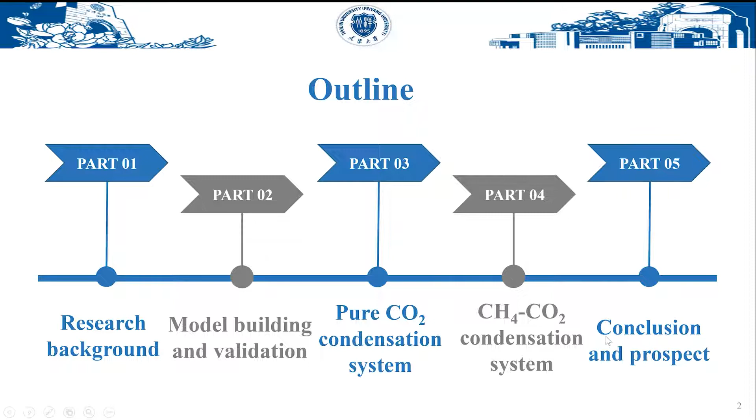My presentation will cover the following 5 parts: research background, model building and validation, pure carbon dioxide condensation system, methane carbon dioxide condensation system, and final conclusion. Let's start with the research background.

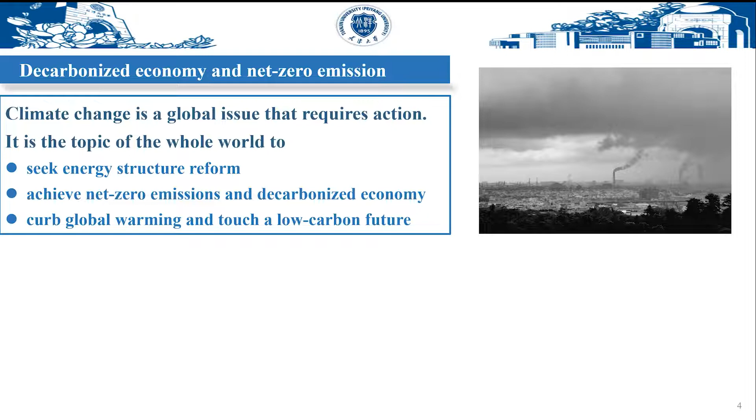Climate change is a global issue that requires action. Climate science has produced mounting evidence that human-caused greenhouse gas emissions must decline if we want to limit global warming below 1.5 degrees Celsius. The Paris Agreement responded to this challenge by legally binding signatory nations to achieve a climate-neutral world by mid-century. The European Commission has also agreed on the European Green Deal, seeking to foster a future with a decarbonized economy and net zero emissions by 2050.

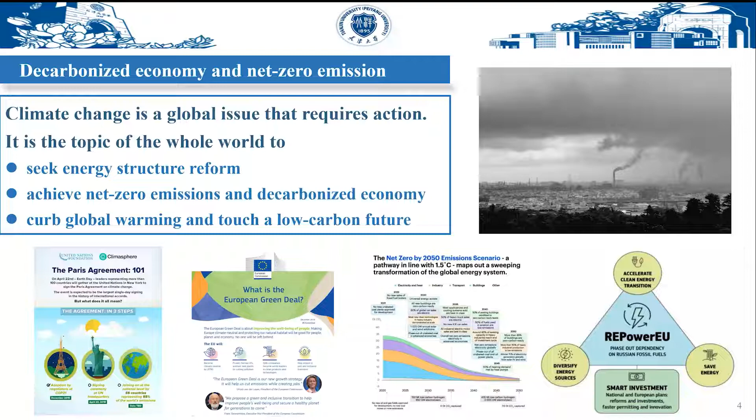The European Commission released the proposal REPowerEU, Joint European Action for More Affordable, Secure and Sustainable Energy. The 2050 net zero scenario developed by the International Energy Agency contends that no new oil and gas fields should be approved after 2021. In addition, at least 70% of the world's energy supply should come from wind and solar energy by 2050. This means the energy structure needs to be adjusted for a low-carbon future.

Carbon capture and storage is one of the most promising technologies to tackle climate challenges. The separation of carbon dioxide is a critical step toward achieving the economic and technical objectives of carbon capture and storage. The present study proposed a novel carbon dioxide capture concept using energy conversion in transonic flows, which is not only a clean process of carbon dioxide processing, but also a way to maximally utilize the thermal energy.

The working principle of the supersonic nozzle, the core component, is that the contraction of the cross-section causes the expansion of gas, which reduces the temperature and increases the gas velocity. The generation of a low-temperature environment leads to the condensation of carbon dioxide gas into nanodroplets. By integrating the principle of cyclone separation, carbon dioxide droplets will be removed to achieve carbon capture.

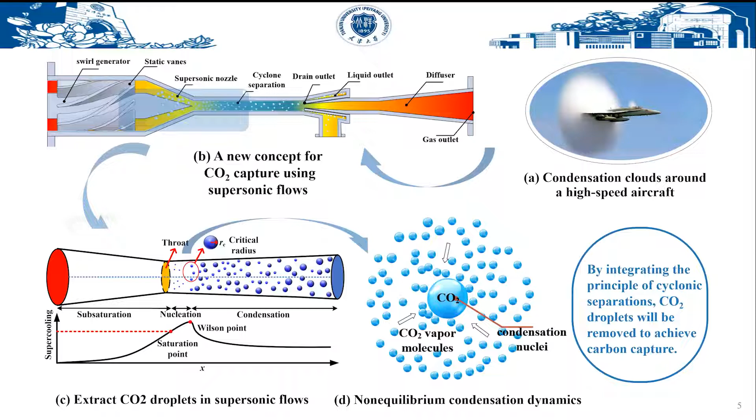The condensation phenomenon in supersonic flow has been numerically studied by many researchers, but there are still some problems. First, most of the subjects are water vapor. The condensation properties of carbon dioxide have not been explored, and most of the physical property equations in their models use the ideal gas state equation. The ideal gas model cannot correctly reflect the phase change of carbon dioxide in high-pressure environments. Therefore, we have modeled the condensation of carbon dioxide in a supersonic nozzle based on a real gas model.

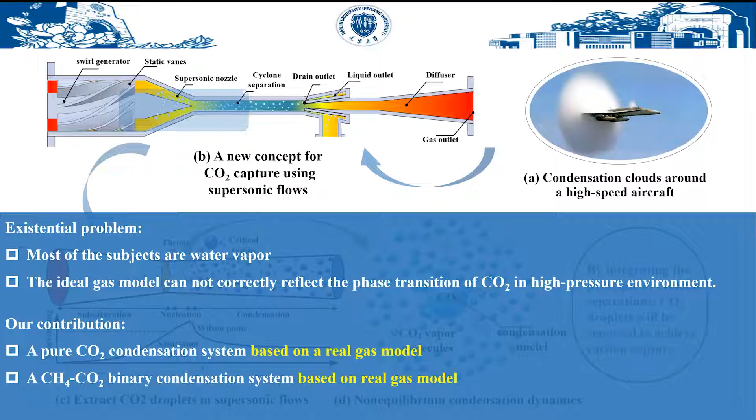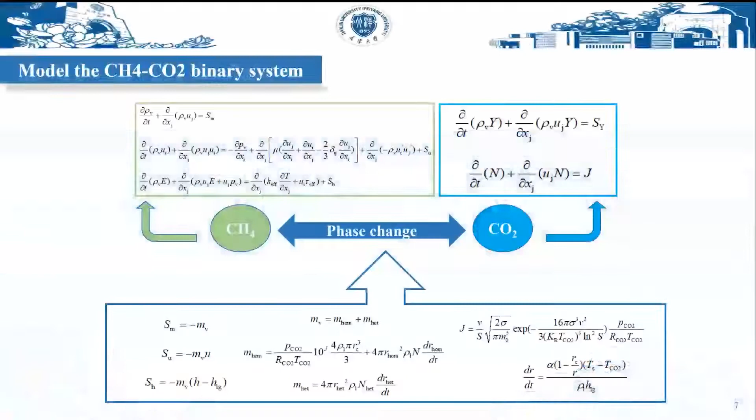Next, please allow me to introduce this new condensation model. In this model, the carrier gas is methane, whose mass, momentum, and energy conservation equations are listed in the upper left. The liquid phase is carbon dioxide, whose governing equation is listed in the upper right. Phase change between gas and liquid is manifested as condensation and evaporation, and is reflected in the source-term exchange in the governing equation.

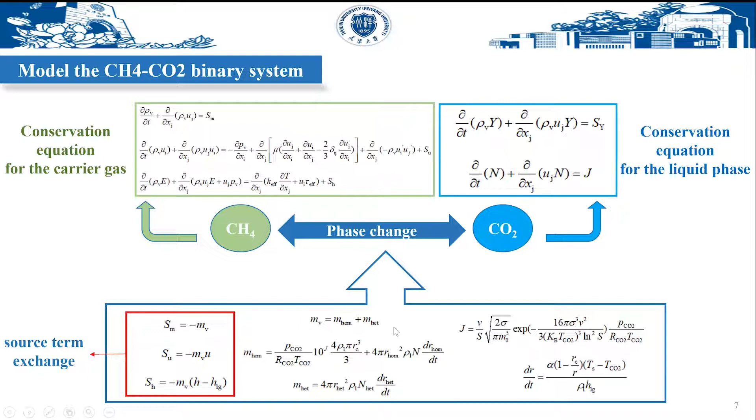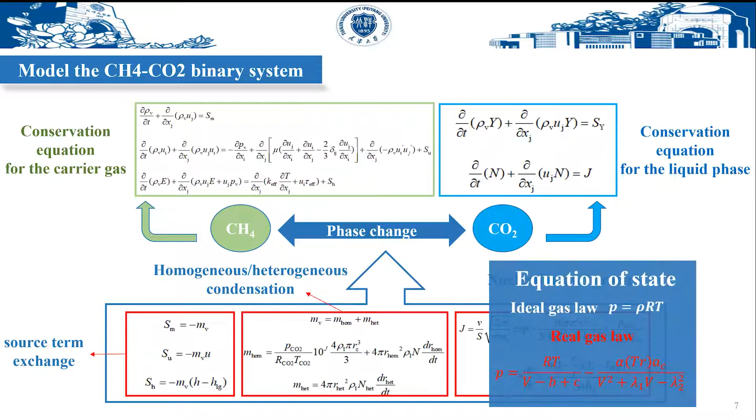Condensation is divided into homogeneous nucleation and growth and heterogeneous growth. In the lower right corner is a formula for nucleation and growth. Here the equation of state changed from the ideal gas to the real gas law.

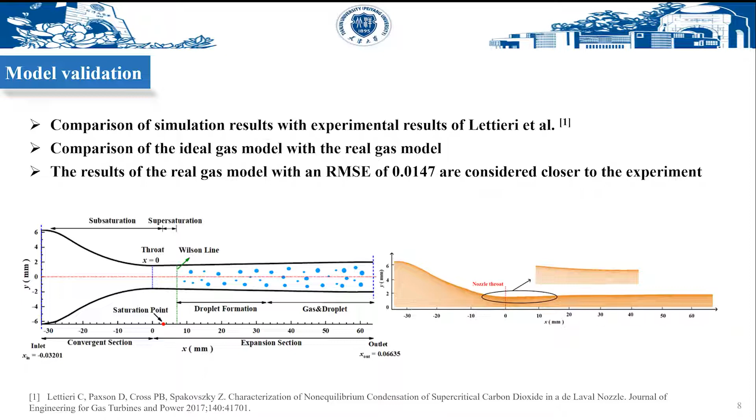Experimental validation was then carried out. The experimental data of Lettieri were exploited, so the same supersonic nozzle used by Lettieri was used for our simulation. The comparison between the experimental results and the simulation results is as follows. As shown in the figure, the blue dots are experimental data, the red line is real gas simulation data, and the green line is ideal gas simulation data.

It is obvious that the real gas model corresponds better to the experimental results. The RMSE error calculation can also prove that the difference between the real gas model and the experimental results is smaller, and its RMSE is only 0.0147. For the prediction of condensation location, the real gas model also shows greater advantages. Therefore, the established model can guarantee the accuracy of the calculation results.

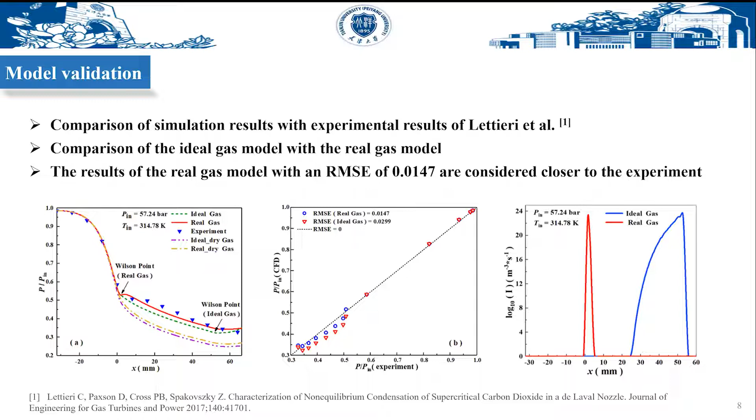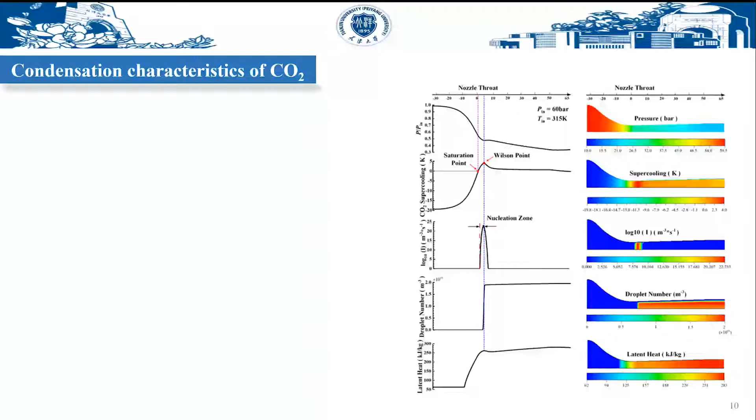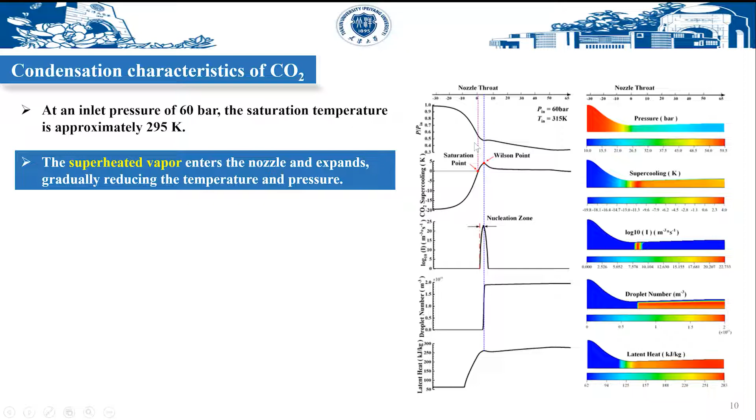Subsequently, the carbon dioxide condensation characteristics in a pure carbon dioxide system were studied using the established model. At an inlet pressure of 60 bar, the saturation temperature is about 295 Kelvin. Set the inlet temperature to 315 Kelvin, at which point the inlet gas state is superheated. The superheated vapor enters the nozzle and expands, gradually reducing temperature and pressure. When the gas continues to expand into supersaturated vapor, the nucleation rate rises rapidly from zero in a short period of time.

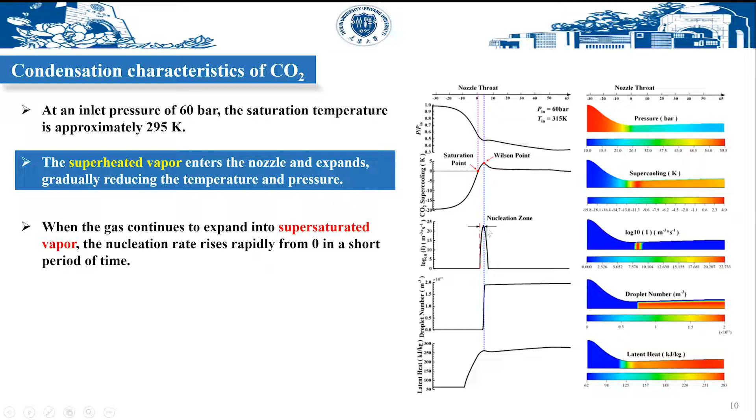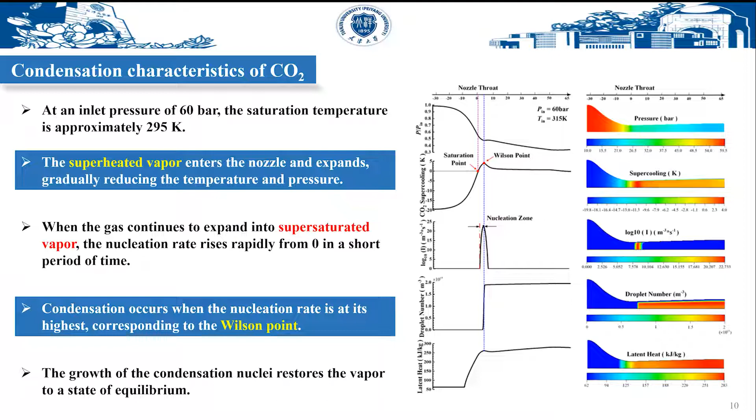Condensation occurs when the nucleation rate is at its highest, corresponding to the Wilson point. The growth of the condensation nuclei restores the vapor to a state of equilibrium. This process is the condensation process of carbon dioxide in a supersonic nozzle, and it can also be changed by adjusting the inlet pressure or temperature.

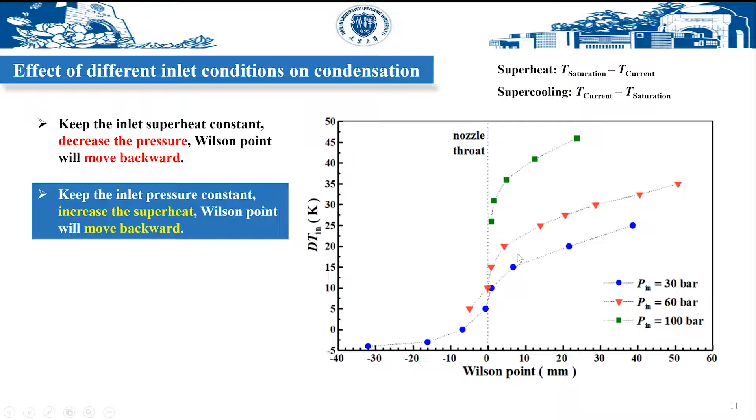Keep the inlet superheat constant. Decrease the pressure, and the Wilson point will move backward. Keep the inlet pressure constant. Increase the superheat, and the Wilson point will also move backward.

Meanwhile, keep the inlet superheat constant. Increase the pressure, and the supercooling at the Wilson point will decrease. Keep the inlet pressure constant. Increase the superheat, and the supercooling at the Wilson point will increase.

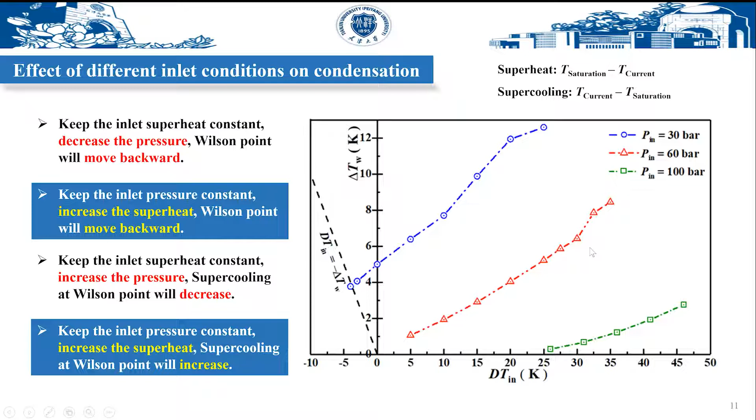Now that we know how carbon dioxide condenses, let's switch perspective and look at the binary system of methane and carbon dioxide.

Keep the inlet pressure at 8 megapascal, the outlet pressure at 2 megapascal. The inlet mole fraction of carbon dioxide vapor at 25%, and increase the temperature. We find that with the increase of temperature, the condensation onset position moves backward, and the subcooling degree at the Wilson point increased by 4.53 Kelvin.

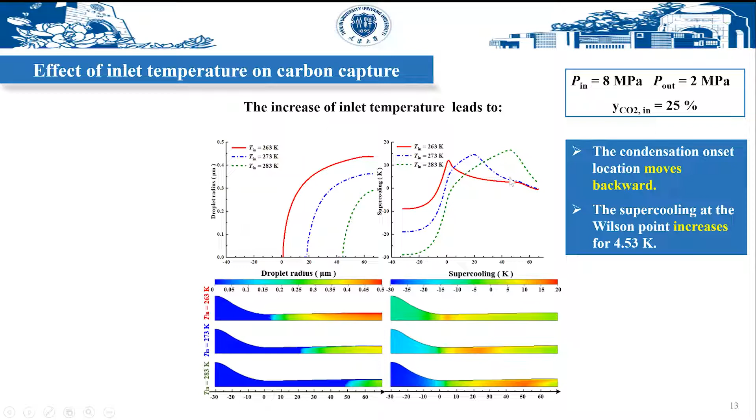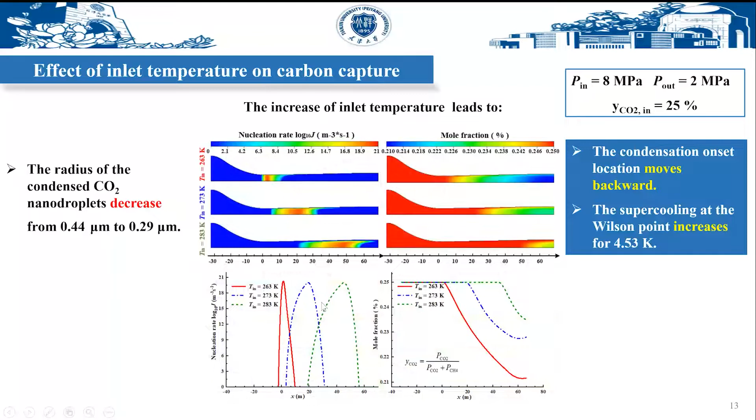The radius of the condensed carbon dioxide nanodroplets decreased from 0.44 micrometer to 0.29 micrometer. The nucleation position moved backward by 43.8 millimeter. The outlet mole fraction also decreased, and the amount of condensation decreased from 19.47% to 7.84%.

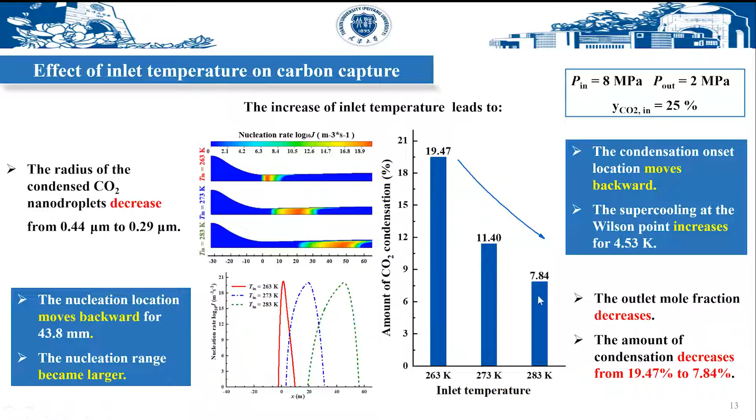Keep the inlet pressure at 8 megapascal, the outlet pressure at 2 megapascal, the inlet temperature at 273 Kelvin, and increase the mole fraction of carbon dioxide. We found that with the increase of inlet carbon dioxide mole fraction, the condensation onset location moves forward, and the supercooling degree at the Wilson point decreased by 12.09 Kelvin.

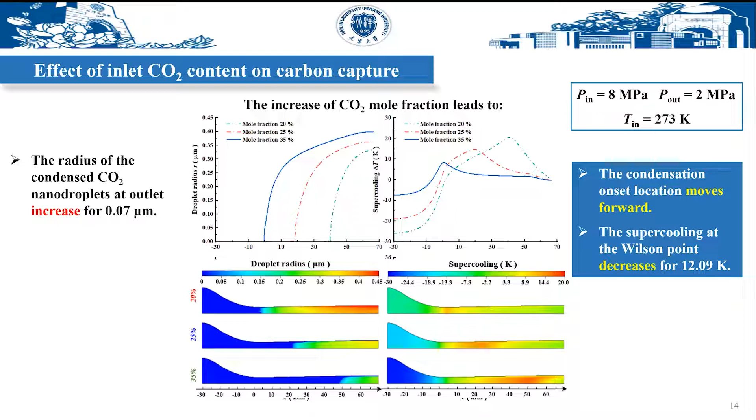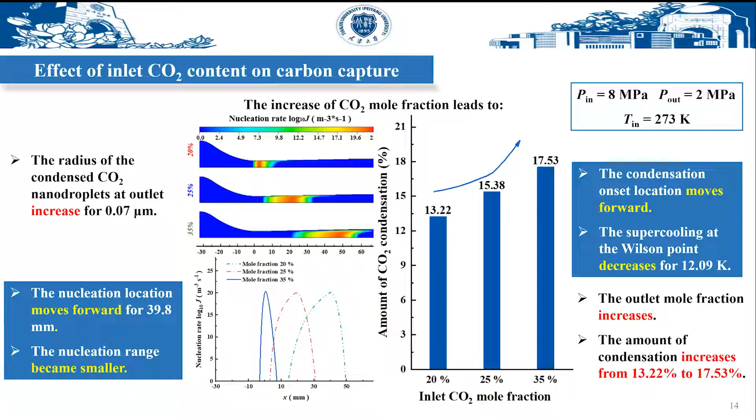The radius of the condensed droplet increased by 0.07 micrometer. The nucleation position moved forward by 39.8 millimeter, and the outlet mole fraction increased, with the amount of condensation increasing from 13.22% to 17.53%.

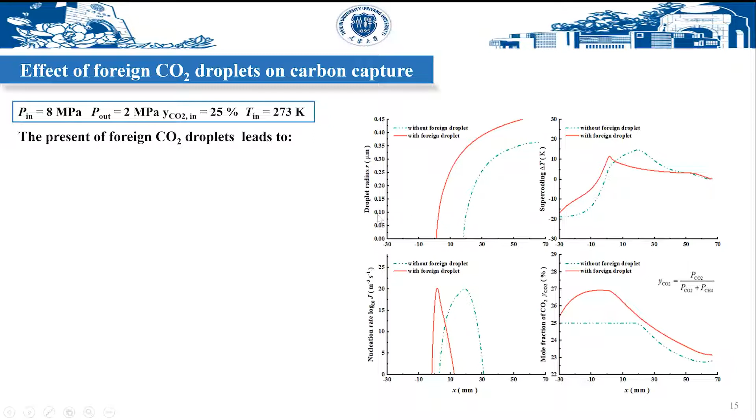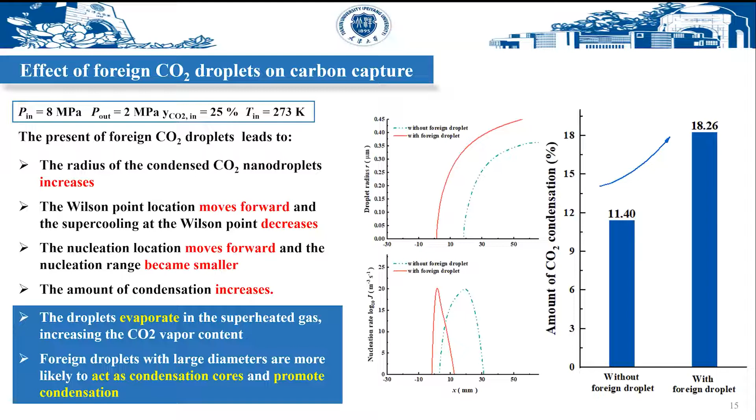We also found that the presence of foreign carbon dioxide droplets will lead to an increase in the radius of the condensed carbon dioxide nanodroplets. The Wilson point location moves forward, and the amount of condensation increases, for the following two reasons. First, the heterogeneous droplets evaporate in the superheated gas, increasing the carbon dioxide vapor content. Second, foreign droplets with large diameters are more likely to act as condensation cores and promote condensation.